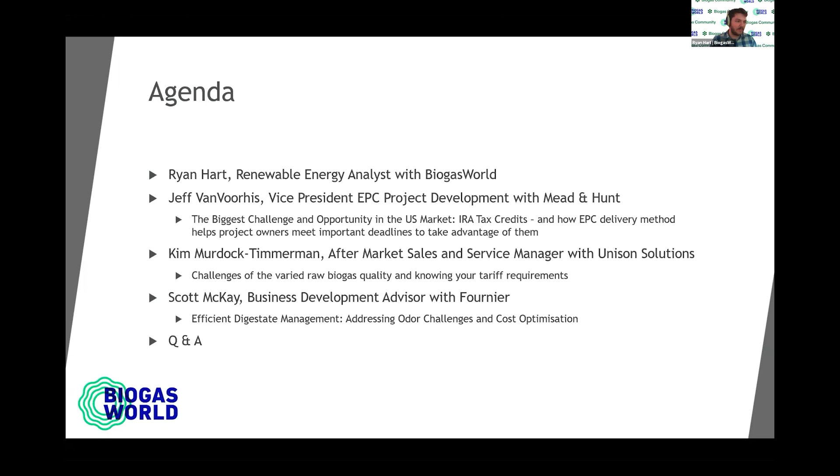Before we begin our presentations, I'll take just a moment to share some insights from the American biogas and RNG market.

Looking left, we see numbers from the American Biogas Council showing approximately 2,300 biogas facilities across the US, almost half of which are located at wastewater treatment facilities. Landfills and agricultural facilities account for around the other half, with a growing number of commercial and municipal food waste digesters coming up. Looking to the right at how biogas is utilized in the United States, a little over half of facilities are utilizing biogas directly for heat or simply flaring it. Combined heat and power engines account for approximately a third of facilities, and the remainder are RNG.

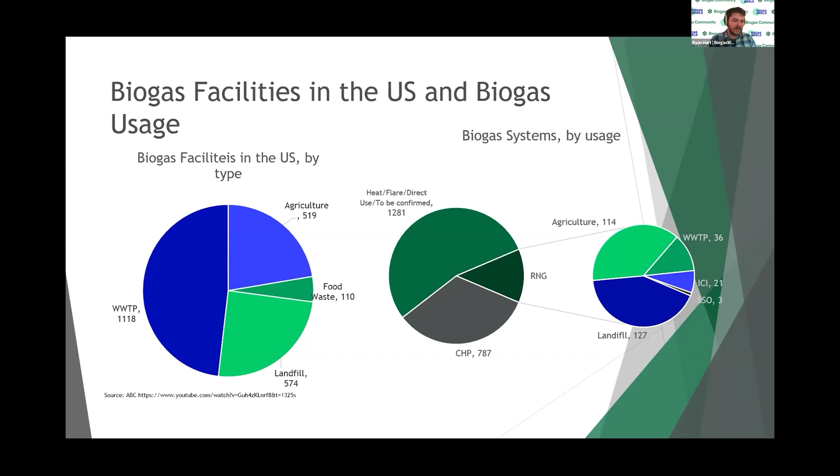Larger projects with a higher potential gas output are looking to transition from flares or CHP to RNG to take advantage of transportation fuel credit markets, which add a valuable source of revenue for projects. However, flares are still considered at small sites where upgrading or CHP might not be feasible.

Moving towards development, on the left we see the most significant growth for new agricultural facilities. This upward growth trend is likely to increase in coming years as the US begins to realize its enormous agricultural biogas potential. Landfills account for the next quarter of new development; however, this type of facility is likely to decline in coming years as municipalities and companies move towards anaerobic digesters to dispose of organic wastes. Commercial, municipal, and wastewater treatment plant projects account for the remainder of facilities in development.

Other in the graph represents second-generation facilities, for example those processing woody biomass. On the right, we've divided US development into subregions, separating the two largest state markets, California and Texas, which account for a third of new development. The Midwest is the next largest region with about 79 new facilities in development, followed by the South with around 56. Thanks for your attention with this.

So we'll now move to our presentations.

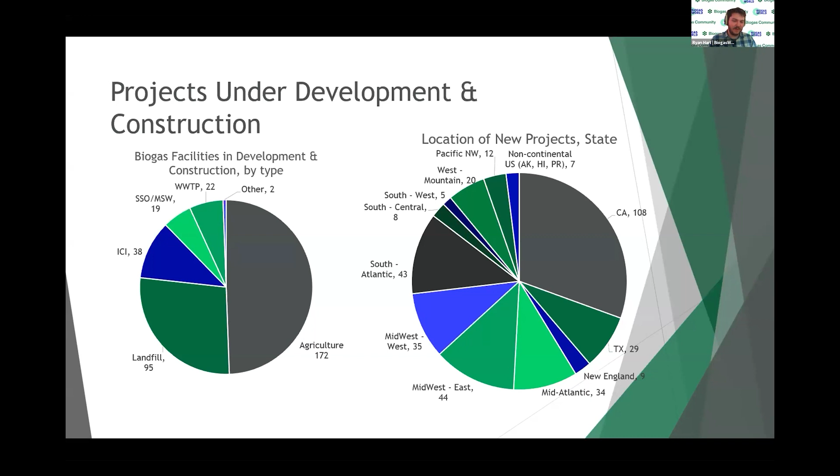All right, thanks for the intro, Ryan. I will share my screen. Is that sharing, Ryan? Yep. All right, sounds great.

Well, thanks for the intro. Like Ryan mentioned, we're an EPC firm, an engineer-led general contracting firm, so we can provide the engineering, the procurement, and construction. And I'm going to share with you real life experience.

We've done biogas projects with a volume of 105 projects to date, with a wide range of locations. I'd say the split is about 50-50 for landfill biogas versus digester biogas, with the digesters being a variety of substrates or commingling of substrates within that portfolio. So drawing upon a broad base of completed work, and I think Ryan mentioned there's a significant number of projects in development, that's what I was hoping to share with you today on the development side of projects from an EPC's perspective.

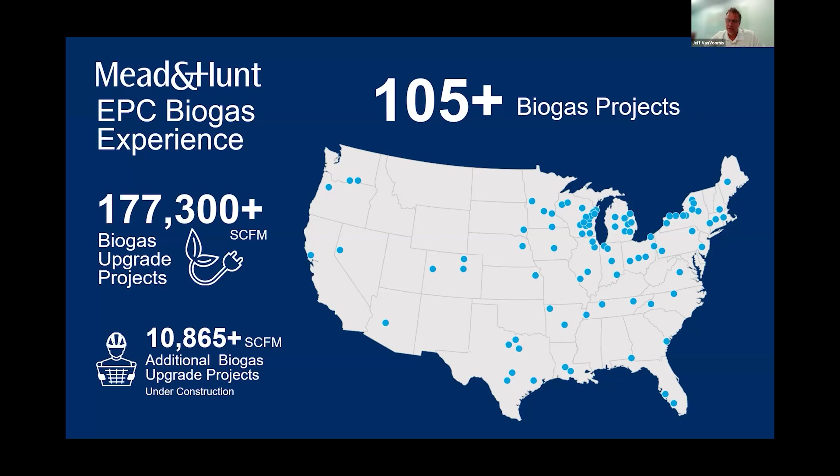What makes us unique as a company, and why we've been able to complete so many projects, is our engineering process and in-house knowledge, where we can work with equipment vendors like Kim, and then execute the project as a contractor, fabricator, and commissioning company to see it through to completion. Understanding all the nuances through that entire cradle-to-grave process of project development and execution is what we can draw upon, with over 100 projects.

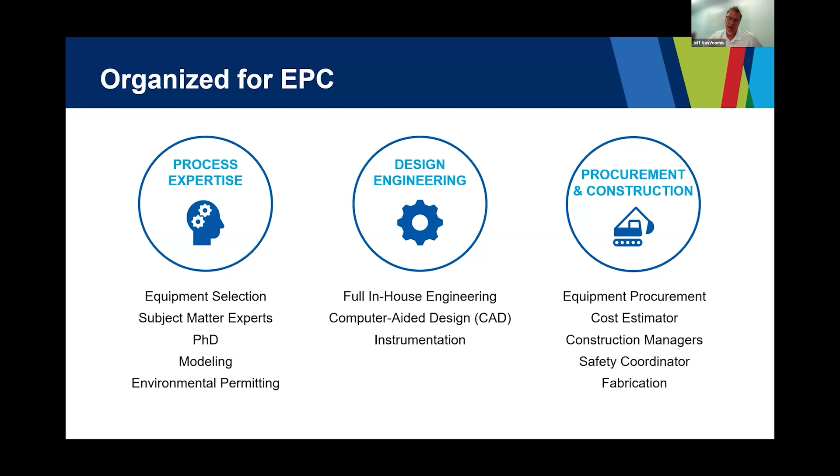So we put together a trusted and proven phase gate process for developing these projects. This is what it looks like from an EPC perspective. Each column represents a milestone for us, and it's really helping drive the project forward versus a traditional design, then go out for bid, then go for build.

We're compressing that overall schedule substantially by using these milestones, but we're trying to de-risk the project by getting adequate information to all the parties involved, such as permitting, financing, and us on the execution side.

One of the challenges, which Ryan had asked me about, that we're seeing right now is the funding mechanisms for these projects, particularly the IRA and the safe harbor associated with the IRA tax credit — getting into construction by the end of this year, or having the percent spend by the end of the year. That requires this schedule to compress even further, especially if we're just starting in June and trying to meet those deadlines.

We're compressing the schedule even further to do that. So how are we doing that? Let me show you a quick graphical representation of what we're doing.

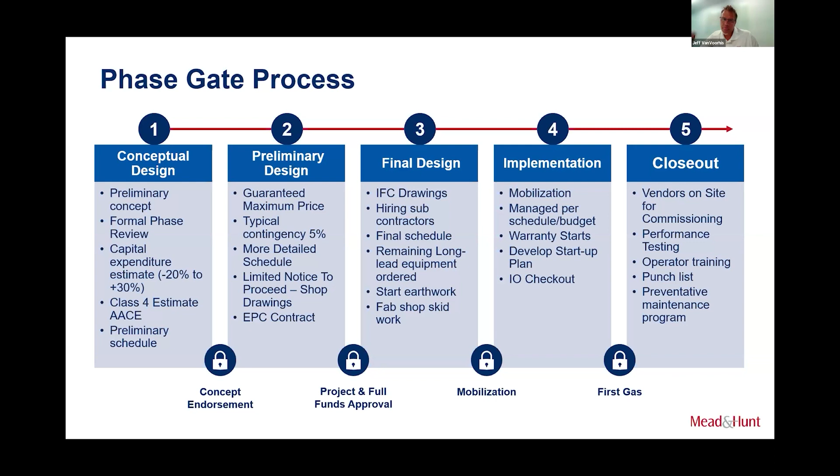We're really doing this by getting into construction or procurement of a couple key components. We identify very early on the long lead pieces of equipment and the substantial pieces of equipment, from a capital perspective, that could meet that threshold spend for the IRA safe harbor. Once we've identified those, it's getting contract terms in place — T's and C's — getting that equipment ordered, and getting all the proper documentation we'd use to submit with the IRA.

Remember, the IRA is a tax credit — it's not that far off from when you pay your personal taxes, where you need receipts to show what you've purchased. It's the same type of thing we'd be doing as the EPC to stay in compliance with the regulatory requirements for the IRS and that tax credit.

So we are expediting that equipment procurement so we can make those purchases by the end of the year, making it very clear what needs to be done for that procurement timeline. We're really shifting our focus a bit from design to procurement, which is abnormal for a typical project — normally we'd be focusing on design, but here we're shifting it to procurement of those key items very early on.

We also may be looking at what we could do to start construction as well. Some entities are requiring us to cover both sides of the safe harbor, doing the percent spend and getting into construction to cover their bases in regard to that tax credit. So we're also pulling some of that upfront work that's eligible under the tax credit into construction, looking at a different construction sequence to keep the project moving and meet that tax credit hurdle.

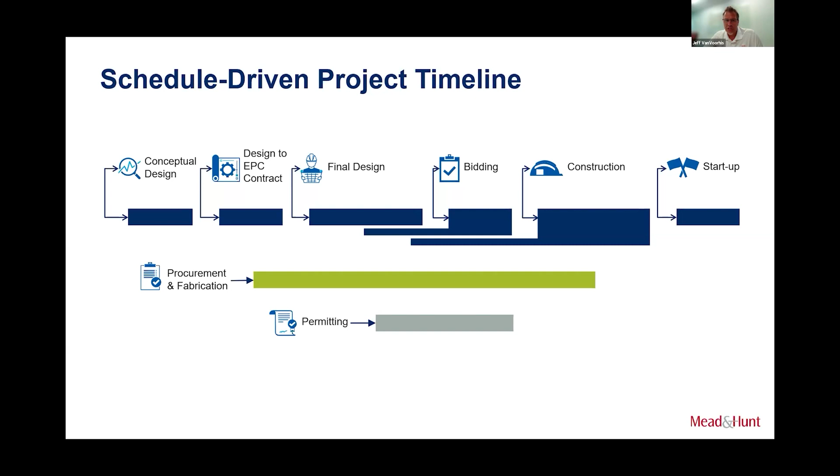Thanks, Jeff. There doesn't seem to be any questions from the audience quite yet, so I will ask you then.

So what is the best thing a project developer can do to de-risk a project prior to the EPC contract?

So it's getting alignment with all the entities. What we would typically provide is a roles matrix to ensure there's alignment of who's doing what, when. I think that's one of the issues we've seen - not necessarily overlap of scope, but typically gaps in scope. So getting together and putting a roles matrix together on who's doing what, at what time, for each phase of the project. So it's not just a schedule, it's actually digging into who's doing what on each part of that schedule and clearly defining those roles. I think that's a great way to de-risk your projects. It's a great question, Ryan.

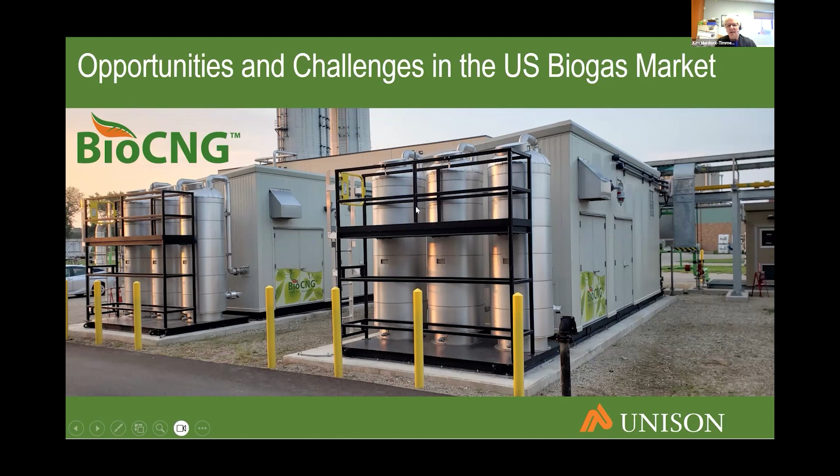If you could forward the slide, Natalia. We have been US based forever, based in Dubuque, Iowa. Two of our owners decided in November of 2020 to sell the company to their employees, so we've been employee owned. We're steadily growing - we've just added 45,000 more square feet to our facility. Currently we have over 395 biogas systems worldwide, so biogas is our definite focus. Okay, now you can go.

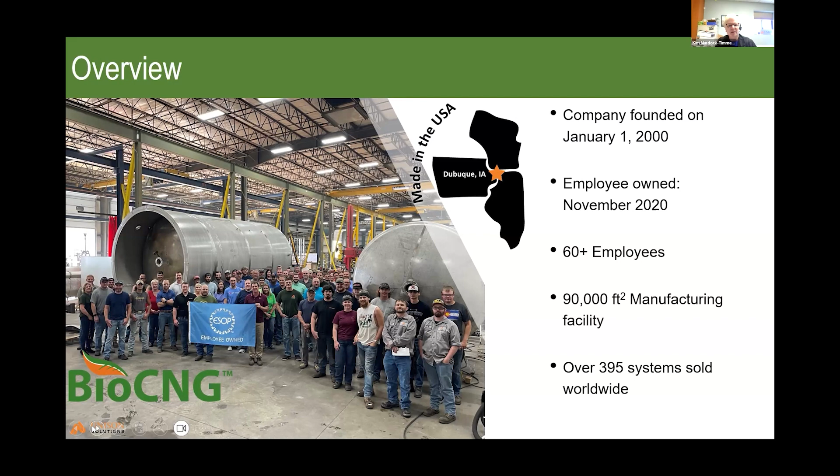As we're talking about today, we're going from biogas though to renewable natural gas projects primarily. We've done systems that were outdoors with those enclosures that we saw just a moment ago. This is another system that we have in Lincoln, Nebraska, that's an indoor installation, and these two particular systems happen to be membranes. Next slide.

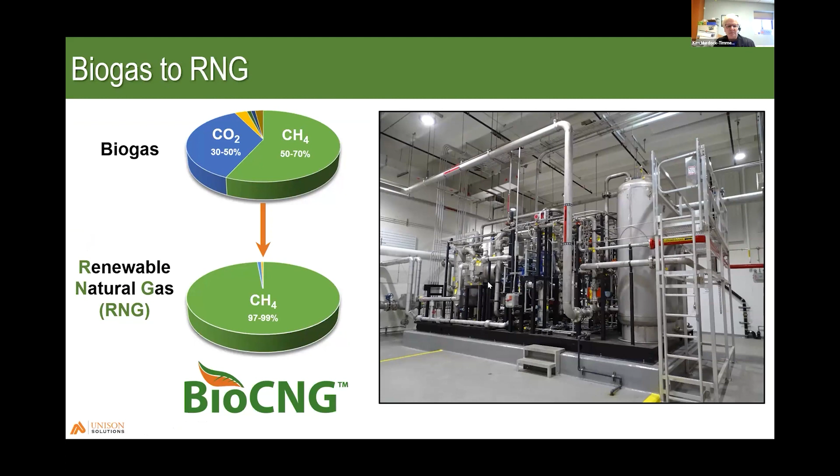I put up our project map just because it's changing a lot lately. This is our traditional map, and this includes customers in the municipal area, wastewater treatment plants, landfills, food, industrial digesters. We're getting a lot of ag systems. But what's interesting is in the past, we always had systems where there were a lot of big populated areas, and now it's kind of like our rural customers are able to get in on the activity because we're looking more at the agricultural. So it's been very interesting.

Our group has been in places we've never been before - western Kansas, Oklahoma, the Dakotas, Nebraska, western parts of those states. It's been a very fun time because all of a sudden everybody's branching out and can get in on it. Those new opportunities are definitely in some of those smaller populated areas of the country. Next slide, please.

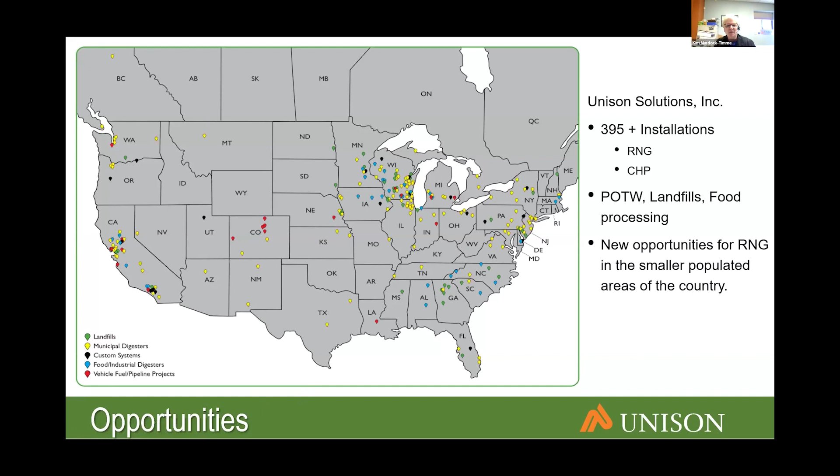So when we're looking at a successful RNG project, folks like we heard Jeff talk about, they're going to look at the big picture and get a concept going. What we like to do is dig into the details. Some of the challenges we've seen have been with determining the inlet gas quality and then what that final specific RNG quality is. RNG is a very general term in terms of what tariffs you're actually looking at based on specific pipelines. That's what I wanted to dig into a little bit more today. Next slide, please.

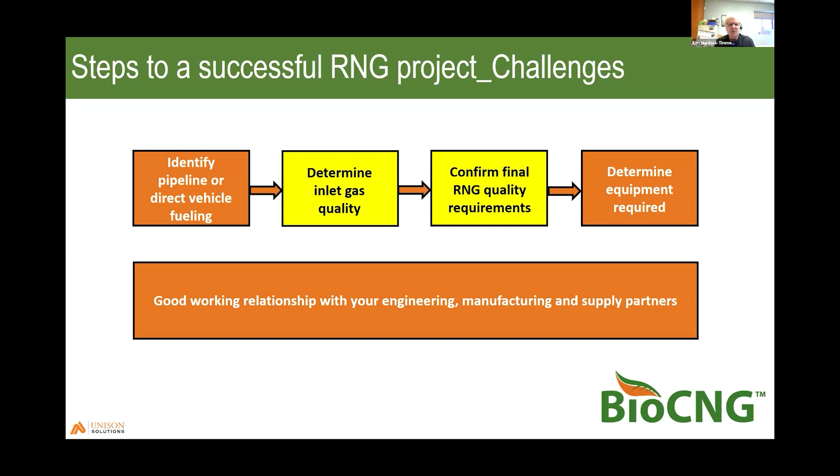So we all know biogas is methane and CO2, usually a 60-40 mix. There's always some nitrogen in there, hopefully not a lot, hopefully not a lot of oxygen. The hydrogen sulfide is going to vary depending on your feedstock, and it can be anywhere from non-detect for sites that do some pre-treatment upstream to over 10,000 ppm - so a huge range for hydrogen sulfide. Things like moisture and particulates are present and fairly easy to remove. The last category is where we get some hiccups - siloxanes and other volatile organic compounds.

It's a big group of compounds, primarily those with hydrogen and carbon atoms, but then there are other ones. Siloxanes are a carbon, hydrogen, and silicon group. There are different VOCs that include chlorinated VOCs, fluorinated ones, hydroxyl groups, and the ketone category. All of those things need to be taken into account. On our pie chart, it's a very small percentage of the overall volume of gas, but it can make a big impact on what you have to do to treat it.

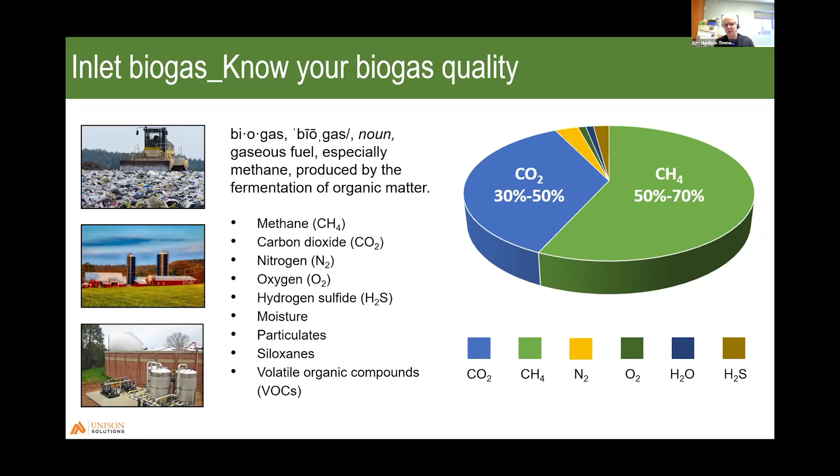So, on the next slide, please.

Siloxanes is one of the things I wanted to talk about, because most sites that have either food waste or agricultural waste come and tell us, 'well, we don't have siloxanes.' Unfortunately, that has not proven out to be the fact. Some sites don't have siloxanes, or they're extremely low, but because of the number of uses for siloxanes in industrial equipment, sealants, and cleaning materials, it's a very popular compound used as an additive to a lot of different things. As that increases, we're seeing siloxanes in almost every biogas sample we see. Every once in a while we'll get one that's below detection, but that's very, very rare. So if you have it in your brain that siloxanes are not going to be an issue, we suggest taking the time to at least test your gas and see what's going on, and make sure of that before you choose your system and pull the trigger on something that's not going to meet your final specs.

So, next slide, please.

When we're doing that inlet biogas testing, this is something you have to do for your EPA qualifier for your pathway - do the raw gas testing. It's also done to figure out that final application. As a bare minimum, we recommend doing the major gases, siloxane, sulfurs, and a volatile organic series. If you know what your tariff is specifically from the pipeline, we can expand on that, but this is the test we like to say is your bare minimum. If you have your digester operating, let's start with that. If you don't, obviously we're going to have to make assumptions. But hopefully before you get to that final startup, we'll have discussed some of the characteristics of your feedstock, and made a game plan of how we get to the point of adjusting treatment based on what equipment was specified.

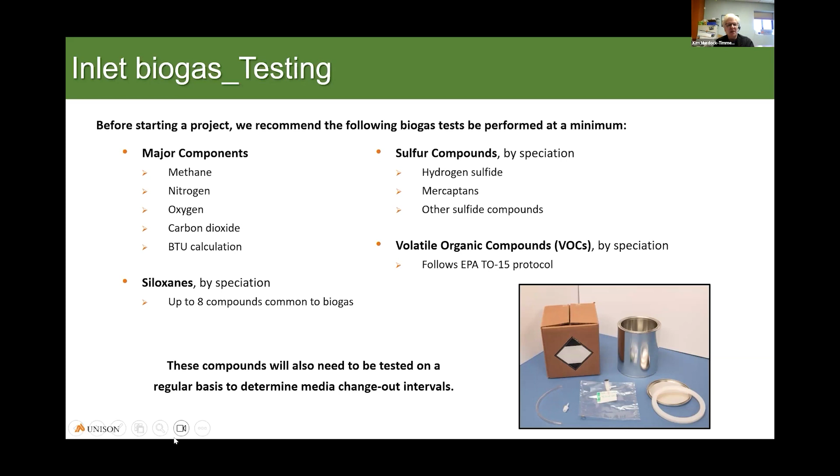So this is our pipeline. When we're talking about it, some of the things we just discussed testing are also going to be standards on the pipeline. One unique thing in the US is that every pipeline tariff is different, and it can be different between sites that are very close to each other on the same pipeline. Depending on the timing of when you negotiated your tariff, your set of parameters can vary from your neighbor's set of parameters. That's a difficult concept for people to think about, because they assume it's RNG, it's everybody's pipeline - but that's just not the case. You really need to ask specific questions and get an actual list of what compounds need to be tested and what the protocols are, because that's important when choosing how to do the testing. Other things to look at are interconnect fees, which vary depending on whether it's an interstate pipeline, going across state lines, or an intrastate pipeline, within a state.

Those fees always come into play, along with things like the flow and pressure required. Some are very high pressure lines, some use low pressure for their insert. There's also the virtual pipeline, which is very popular with a lot of our ag customers, where they're using compression and tube trailers on site, taking it to another tie-in location. So there are lots of ways to do it, but also lots of questions to ask - especially the gas requirements, which can make a big difference on your equipment. The other thing to look at is what affects your ongoing costs: what RNG monitoring you'll need, and whether some of it can be done online, since some tests cannot be done online.

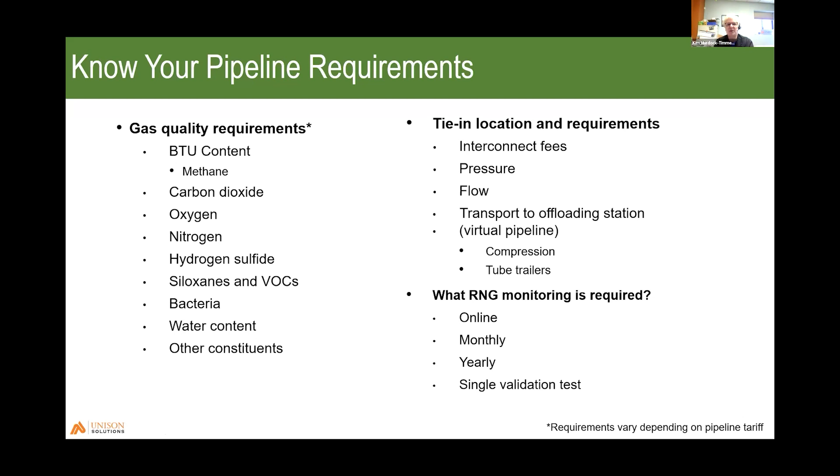All very important. So I wanted to give you an example of what we've seen. Raw biogas, as we said, the methane is usually around 60 to 70%, the balance being CO2. H2S is all over the place. Siloxanes and VOCs are all over the place. Again, that's based on your waste stream.

The example of the natural gas pipeline spec is just a very general one, and a good portion of the pipelines we've worked with in the US fall into this category. Then every once in a while you'll get an anomaly. So the DTE spec on the far right is very straightforward, but the oxygen is the kicker. If you were just thinking you'd go with the basic natural gas fuel spec, and didn't realize DTE has an oxygen spec that's extremely low, that alone means a whole other piece of equipment is required to take your oxygen from the 0.2% coming out of our system down to 0.0005%. So it can make a big difference.

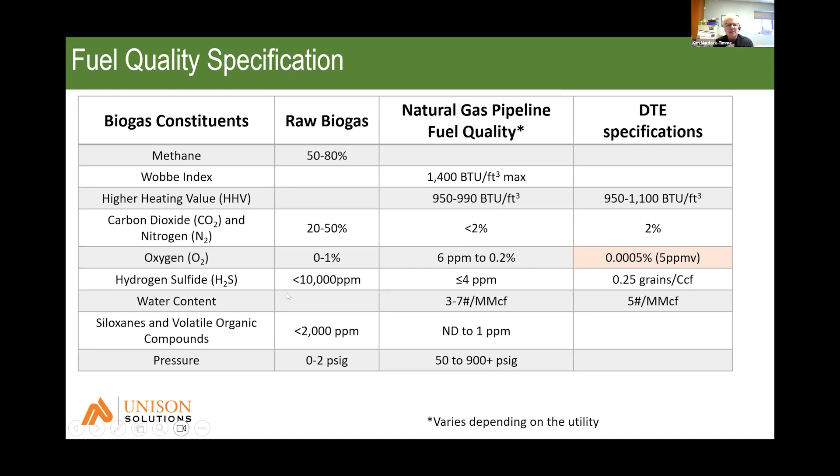The other thing you have to look at is, are there specifics? This is an example of a spec in the Western US. You can see the very general specs on the left-hand side, and they're pretty standard. Then this particular pipeline really goes into the details of what you have to test, grouping the organics. For this location, there's a fair amount of testing that has to be done. Luckily it's only done yearly, but it's just one example of how it can vary a lot. You can have just a quarter page of specs that have to be met, or multiple pages of very specific organics and groups of organics. So don't assume everything's going to line up and be the same.

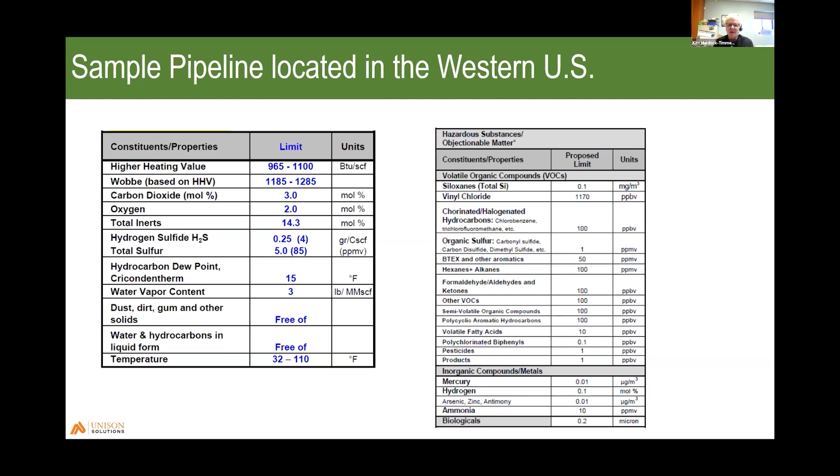So when we're talking about that DTE spec, this is Grand Rapids again. We've got the hydrogen sulfide removal vessels on the lower left. This particular site is a municipal wastewater plant, and they've got two redundant 400 SCFM systems. Inside those enclosures, we're taking out the moisture and particulates, compressing the gas. Siloxane vessels are at the front, that's another fixed bed media. Then it goes into the CO2 removal, which in this system is membrane based. And then we have a bacteria filter.

This happens to be a 3-pass system that gives you a really high recovery rate for methane. That helps with your emissions, and it also increases your CI score, which is important when you're doing your EPA pathway. And then for that oxygen spec, they have a completely separate deox system, shown on the lower right. So you can see that one line in that very simple spec can make a big difference in the amount of equipment required.

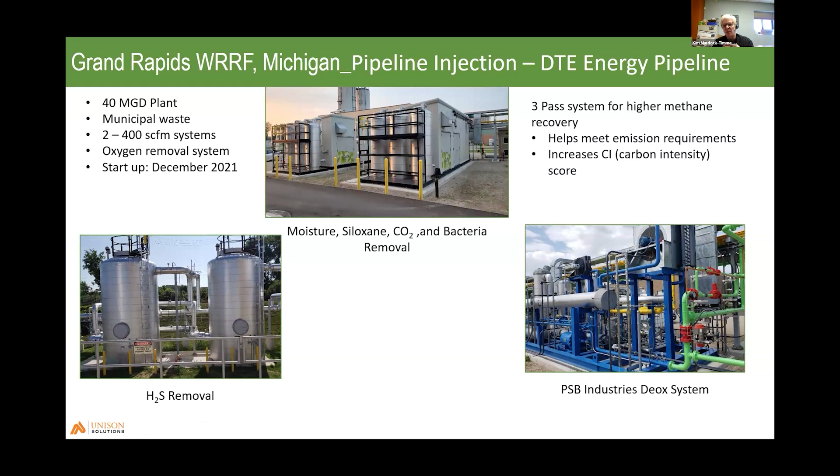The other thing to think about in the planning stages is where you're going to put everything. Typically the H2S vessels will get the best operation if they're close to the digesters. H2S media traditionally likes 100% saturated gas, so you want to keep your pipe run as low as possible. On the other end of the spectrum, the equipment for taking out moisture and particulates and injecting it into the pipeline all wants to be together as well. It doesn't have to be right next to the digester necessarily, because the piping between those two is not as critical.

It's just something to think about when you're laying it out. We sometimes have people say, well, we just put everything together, which is fine. But if your injection point is a long way away, then you have piping costs. So that's just another one of those challenges to really look at the big picture before you get too far into your project.

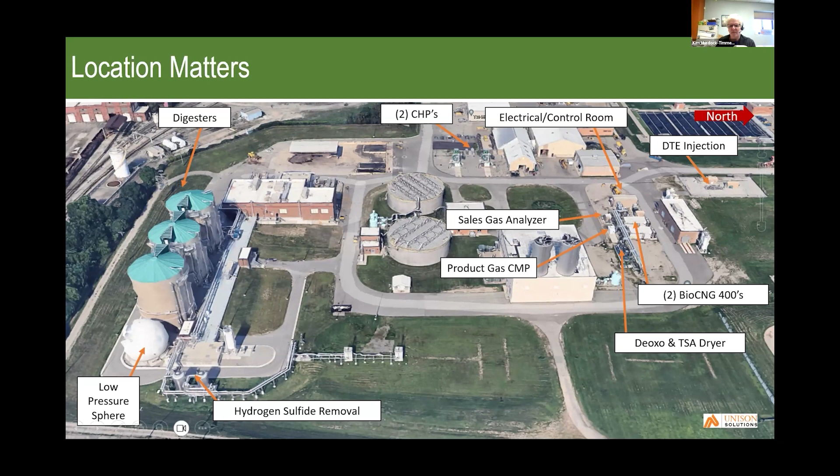I appreciate the invitation. We're always available to help customers at any part of their process. Reach out if we can help you with anything.

Thanks, Ryan. Thanks for your presentation, Kim. On the topic of testing biogas and the parameters you discussed, could you talk a little about what's important when you're choosing a biogas testing lab?

If you have your tariff, the most important thing is to see if they have any specifications. So if the tariff specifically says we want you to follow protocol ASTM, whatever it is, or EPA protocol, know that up front, because when you're getting evaluated by the EPA, it's really nice if everything lines up nicely. So if they want your major gases as an ASTM D1945, if that's the protocol you've used, then there's no question. It's not that other protocols won't work, but it just makes everything a little easier if it lines up with your tariff.

And then for the siloxanes and VOCs, we like to get that data as low as possible. So we usually recommend a detection limit of 5 parts per billion, and the data needs to be speciated. We don't want any total siloxanes or total organics. It needs to be by component, because those components all have a different removal rate when we're looking at fixed bed products for taking them out.

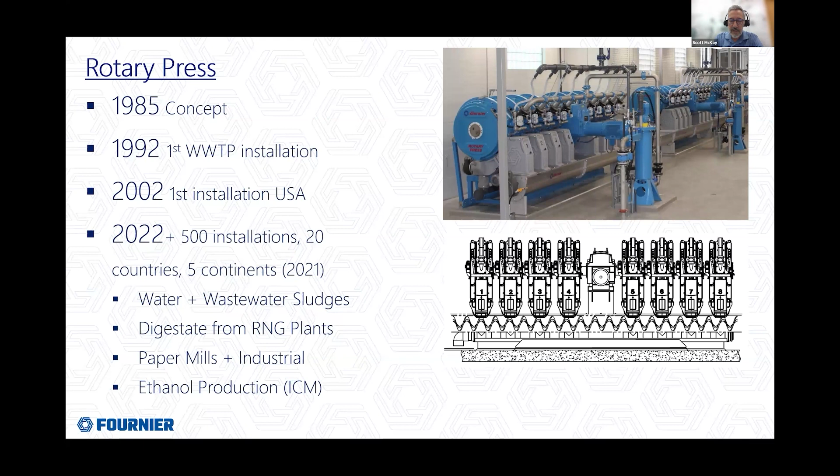Mostly in wastewater treatment plants, but also more and more in RNG plants. An interesting fact is that the area that has developed early with us with the RNG plants is in Scandinavian countries, and now there's also Canada and the US. So it's a market that is definitely growing.

If you consider the dewatering process, there are different steps once the organic matter has been digested through the anaerobic digester, has generated its biogas. You need to pull it out, and in order to remove the water out of it, there's a few steps, usually coagulant, then flocculant is added. Both those two different chemicals have different goals, but at the end, they need to be blended in a flocculation tank that will allow the solids to agglomerate together and be easily separated in the next step, which is being dewatered.

Of course, at Fournier we use the rotary press, but dewatering is typically done in many places by screw presses, centrifuges, and the rotary press is a little bit the new kid on the block.

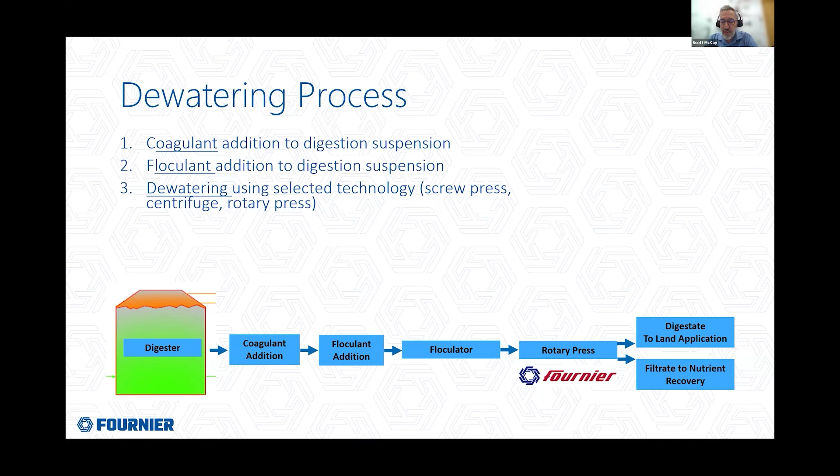And the filtrate then is a fairly clear and clean liquid, but it does still contain a large quantity of different nutrients, typically a lot of nitrogen that will be mostly in the form of ammonia, so which gives it a pretty strong smell, but that can be concentrated later.

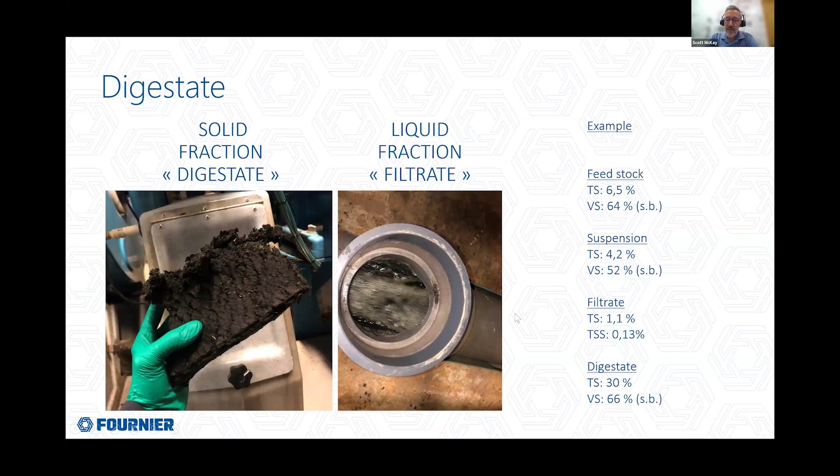One very important factor, when you will be at the end land applying the solids, is the odor. Especially when there are biosolids from wastewater plants involved, the odor can build up over time.

So there's different ways to reduce them. In the past, biosolids, for example, have been mixed, blended with lime, fairly large quantities of lime, but that's not well suited for all the lands. It also increases the weight, it has a cost to it, and when it's coming out of an anaerobic digester, it's been stabilized, and that shouldn't be necessary to add lime.

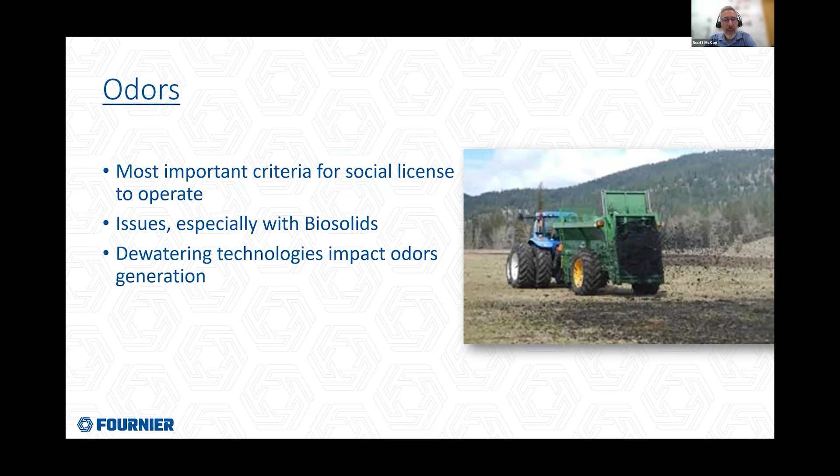It's been found that different dewatering technologies, or some dewatering technologies, can actually generate odors, and there have been some studies that have demonstrated that the liberation of certain types of proteins are precursors of odor, because they become food for the type of bacteria that generates organo sulfur compounds.

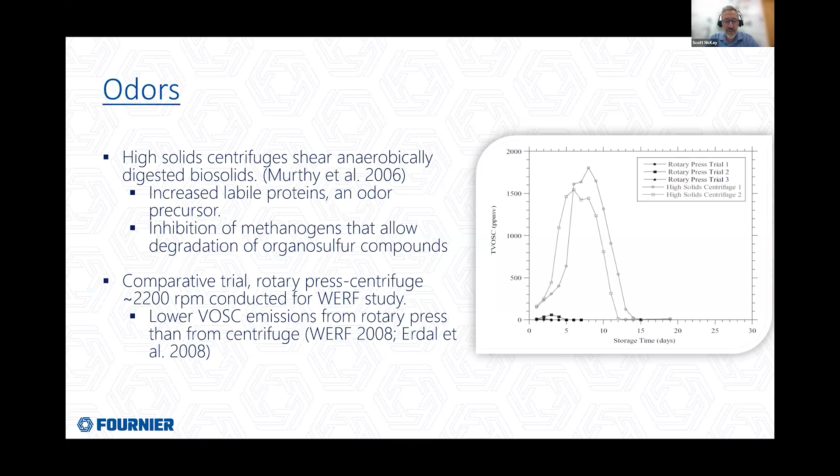In a comparative trial, a side-by-side trial, the total volatile organic sulfur compounds that have been identified as being a major source of foul odors have been measured during the storage time, and it's been demonstrated that materials coming out of a high-solids centrifuge generated fairly large concentrations of these compounds, while material that had been dewatered through a rotary press had very little, if none, or close to zero, non-detectable concentrations of this type of compound.

It's also important to have a good solid liquid separation, good dewatering, to give more value to the liquid and solid byproduct. As I mentioned earlier, higher dryness will reduce the transportation costs, but they also, when it is dry enough, can be used, sold to companies that manufacture and sell soil amendments. So they will also require a certain level of dryness, and these materials can also be dried.

There's different locations that dry them and sell them as pellets. In that case, of course, you want to reduce the amount of water that you will have to evaporate through drying, because it takes a lot of energy to evaporate water. And we mentioned the odors.

On the liquid stage, well, having a clean liquid digestate will allow, in some cases, some locations to use that water for irrigation. Since there are nutrients in it, it's called fertigation. So you want a clean filtrate in order not to clog the nozzles that will spread that irrigation. You don't want to clog your irrigation system.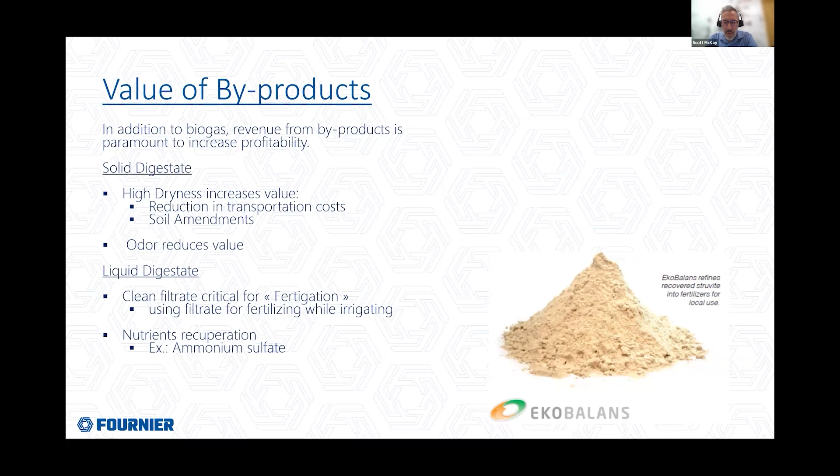And if you are recuperating nutrients from different types of concentration systems, or there's also some evaporation systems, of course if there's too much solids in that liquid, that will eventually reduce the efficiency of those treatments.

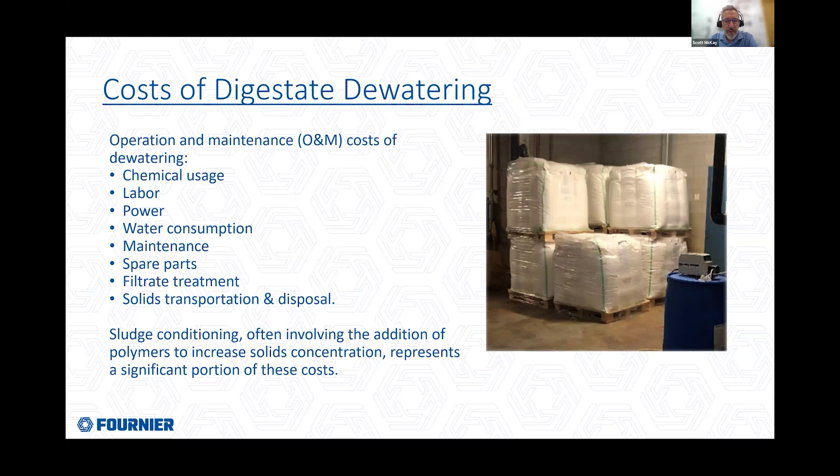There's a lot of different costs involved in dewatering, so I won't go through all of them in detail, but it's been found that in the cost of dewatering, about 50% is related to chemical usage, especially polymers, which are very costly. So it's also important when you select your dewatering equipment to make sure that you select equipment that will use as little polymer as possible.

So in conclusion, dewatering can be important to reduce the volume, facilitate the management of this material, and generate valuable byproducts. So it's important not to overlook this step, even though, of course, the biogas is the focal point in your design and eventually your operations, but good quality products will be well accepted on the market, and will also contribute to profitability of your operations.

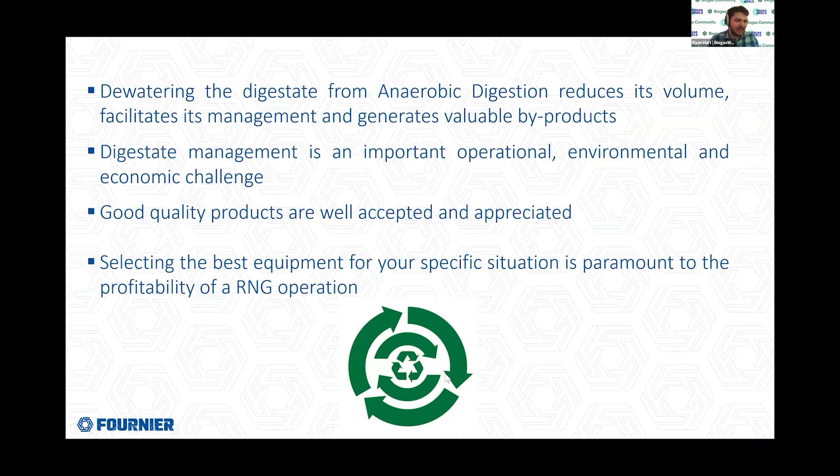Great, thanks Scott. We had three great presentations today: project challenges and opportunities with Jeff from Mead & Hunt, specific challenges of upgrading projects by Kim with Unison, and digestate treatment opportunities and challenges by Scott with Fournier. So opening it up to all our presenters, when looking at the biogas and RNG market today, what do you see as emerging territories gearing up for new biogas plants, or do you think it will still be mainly the same territories from the past few years?

I think there's going to be a bunch of scattered ones. Any place where there's large agricultural facilities, and even small agricultural facilities that have decided to work together and either combine their waste or have a central treatment plant — that's what we're seeing. It's not in one location at all, but it's almost all in rural areas, away from the big cities and out into the countryside.